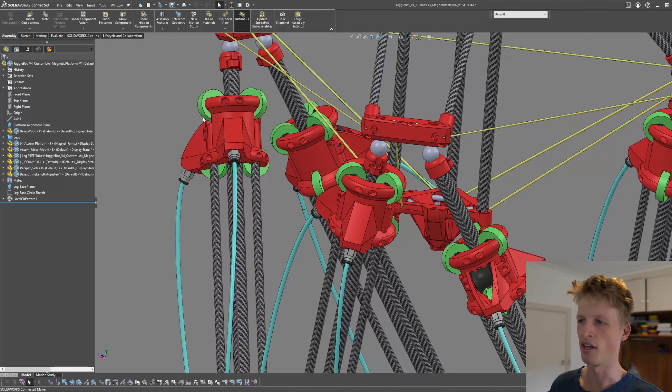I'm very excited about this video because it shows a pretty important upgrade that I'm making from the old design to the current design. Specifically, we're going to be going over the joints that attach the legs to the platform. I think to understand why these joints are the way they are right now, it's worth going back to revisit the old designs that I had to see why they didn't work.

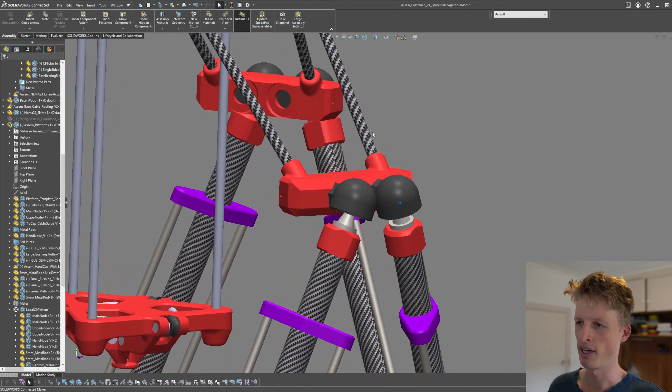The very first design that I had for this component consisted of some ball joints that I just bought online. And these joints were decent, they're very cheap, they're very easy to use, but they have a very limited range of motion. They can only move, I think it's like 50 degrees or something before they hit their end in any direction. And that's pretty annoying. That's very, very limiting.

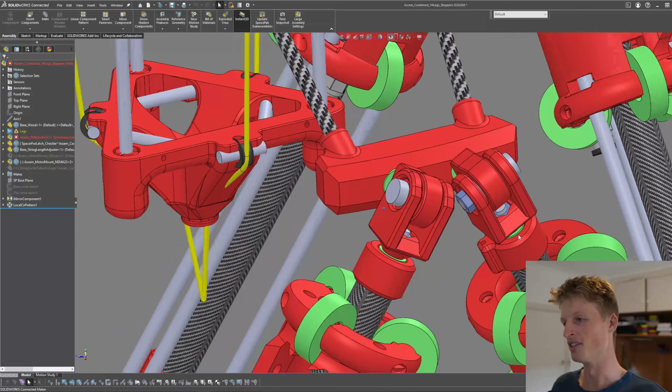Because of this limited range of motion, I had to be really careful with where I was positioning them, and if I made any changes to the rest of the platform, I would have to go back and change the angle where these cup parts attached onto this printed part. And I forgot to do that a couple times, and it meant I just had to keep reprinting parts, and it was really annoying. So the limited range of motion really killed these for me, and made them not really an option.

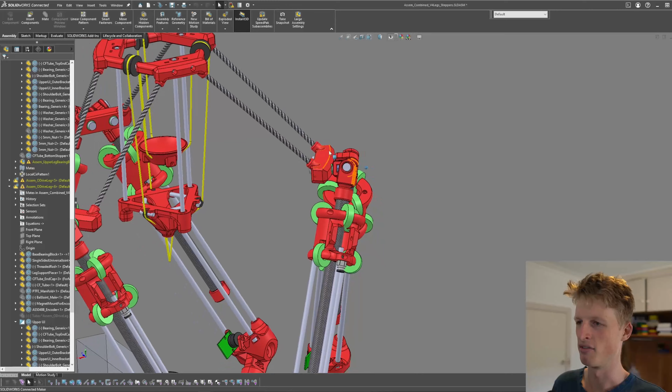Moving on from that, the next design that I had was these universal joints that I designed. And I think they look pretty cool, but they have some pretty big problems as well. The main one is that this part here is very small and is not super strong after it's printed. And one of these actually broke in my testing of Jugglebot, and I don't want to have to keep reprinting everything to make it all work.

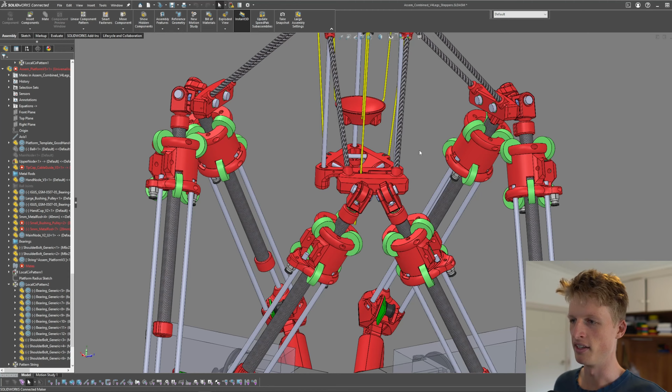Another big problem was that it's not really that modular. Like if I'm putting the platform part onto the rest of the legs, it's really tedious to have to screw up all of these bolts and do them one at a time. It's very slow and kind of hard to hold everything at the same time because there's 6 things that all kind of want to go in different directions, and it's annoying to have to hold them all.

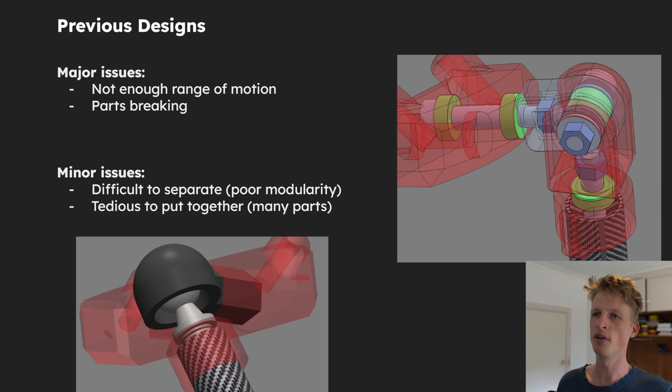This design definitely was better than the original one because it has a huge range of motion. Like these joints can go in any direction that I want them to, but their limited strength is a bit of a weakness, and the fact that they're not very modular was pretty annoying, and I would prefer to move out of that if I can. So the earlier designs, one of them didn't have enough range of motion, one of them kept breaking, and they're both pretty annoying to separate from the rest of the design, and the second design had way too many parts.

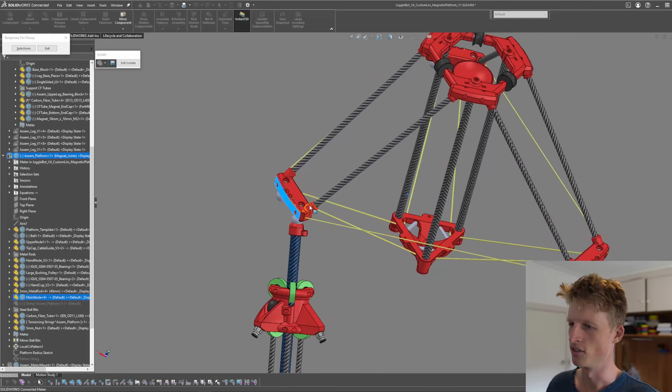Before jumping into my new design, it's worth going over what the design requirements of this part are so that we can see what it actually needs to do. The first one is that it has to be able to support 3 degrees of freedom. Now this might sound a bit cryptic, but all that it means is that the platform up here needs to be able to move relative to the leg in 3 ways. And these 3 ways are the 3 rotations.

So if I can drag this around, if it plays nice, it needs to be able to rotate that way and that way. This is a little bit messy, but hopefully you get the idea. And that way. If it can't rotate in all of these ways, then the mechanism will get jammed up in some positions and something will break. So it needs to be able to rotate in all directions.

The second design requirement is that it needs to have a really wide range of motion. I want Jugglebot to be able to move as far as it possibly can, and to do that, the joints themselves need to be able to move as far as possible. The third design requirement is that they must be easy to disassemble, and by this I mean easy to remove from the platform. I would like to be able to separate the platform from Jugglebot very, very easily, and to make any changes that I need to make without having to screw and unscrew everything. That was really frustrating with the old design.

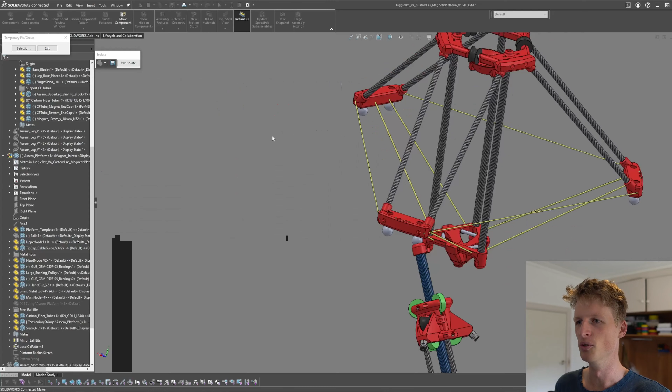Finally, this joint needs to have a solid and strong connection that is very smooth. If the joint is gritty at all, then it will impede the motion of Jugglebot and it will make it harder to control where it's going. So I need this joint to be really, really smooth so that as Jugglebot moves around, the joints just slide nicely and allow that motion to happen. It would also be quite nice if this component had as few parts as possible, because more parts is more effort. And effort is bad.

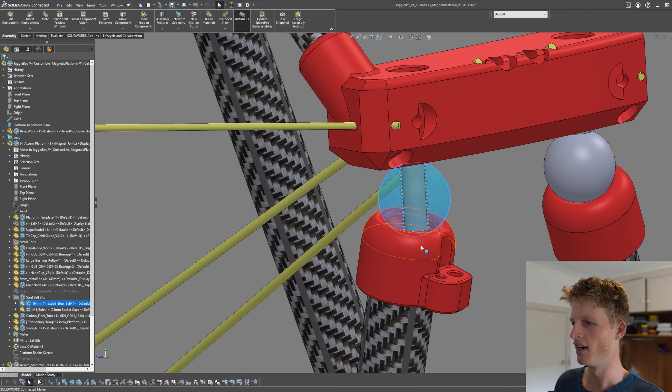So that brings us to my new design, which looks like this. And you can see already that this is far, far simpler than the previous design.

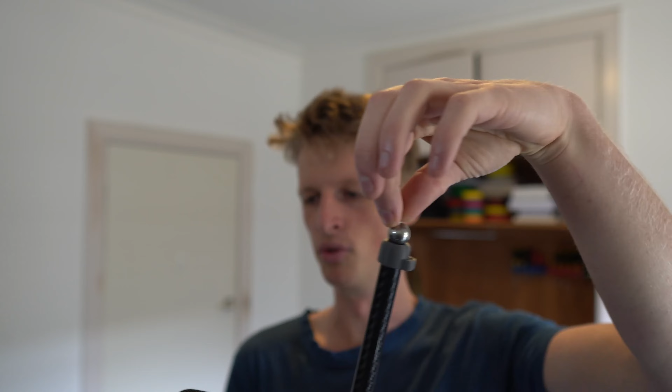So here, all that we've got is a bolt that comes through the printed part that's held on with a nut. That bolt screws into a metal ball with some thread. And then that ball is attached with a magnet to the leg. So this can just stick and unstick. And if you see here, it's very easy to separate it and attach it.

This joint moves super smoothly. There's really not much stopping it from sliding around, and it ticks all the boxes. Super wide range of motion. This can go really far in all directions.

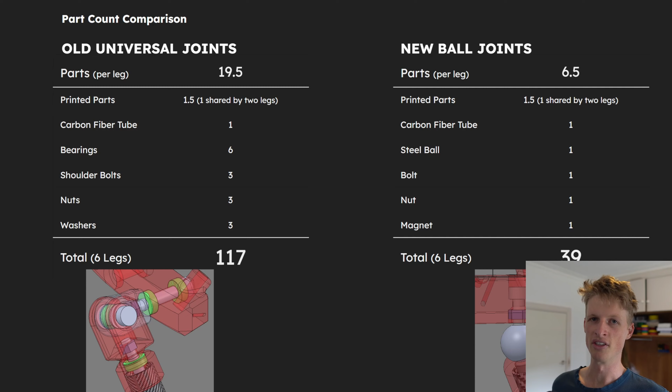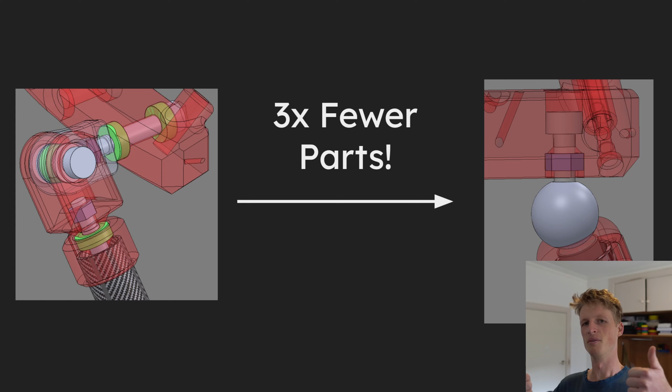It's great. To give this design an objective comparison with the old design, we can do a part count comparison. And we can see the old universal joints have 19.5 parts per leg, including all the bolts and the bearings and everything, which means that in total, between the 6 legs, there are 117 parts, which is nuts.

Compared to the new one, where there's only 6.5 parts per leg, meaning that there's in total only 39 parts between all 6 legs. So this means we have a 3x reduction in the number of parts that are needed for this component, which is fantastic in my mind. I'm very, very happy with that.

So this is all well and good, but does it actually meet all of the design requirements? The first is that it needs to support 3 degrees of freedom. And we can see pretty easily, just by holding it and moving it around, it can twist. So that's 1. It can move this way, and it can move the other way. All 3. It's a ball in a socket. Done.

The second is that it needs to have a wide range of motion. As we've already seen, it has an extremely wide range of motion. Third, it needs to be easy to disassemble, and it's a magnet. It's about as easy as it gets. And the fourth is that it needs to have a solid and smooth connection.

As for the solidity of this connection, it's definitely not as solid as the previous design was, because that was all hardware parts that were bolted to each other. And so this one can be removed, but it's fairly strong, and I think it will be strong enough.

I am not a Stewart platform expert, but I'm pretty confident that all of the forces that are going inside the legs are purely in the direction of the leg. So there should be very little force acting to separate this magnet from the leg. So I think that 450 grams-ish of force should be more than enough.

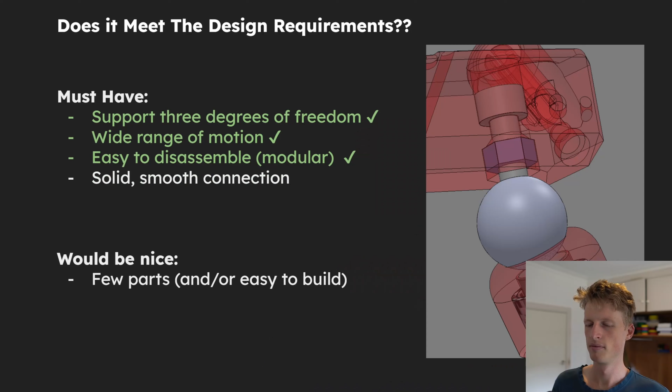As for the smoothness, this joint is fairly smooth as it is, but just in case it isn't smooth enough and it does cause some friction problems, I've bought some PTFE sheet that I might be able to stick between the ball and the printed part to maybe smoothen it up a bit.

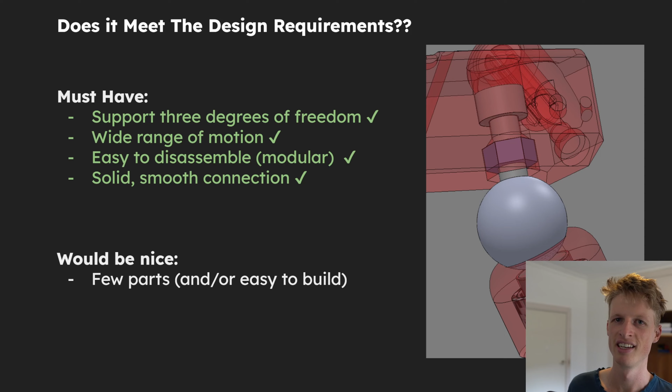And I'm thinking also I could add some fabric that I could lube up, and that will smooth things out a bit. But as it is, I'm pretty surprised with how easily the steel ball slides on the printed part. It's really quite good. So for now, I definitely consider this to have a solid and smooth connection.

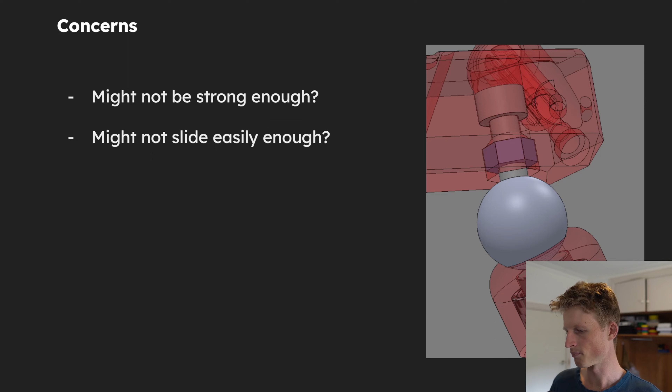And as we just saw, this design absolutely meets the would-be-nice requirement of having fewer parts, with a 3x reduction of the old design. So I'm pretty happy with that. Ticks all the boxes. I don't have too many concerns with the design, but one of them is that the magnet on the ball might not be strong enough.

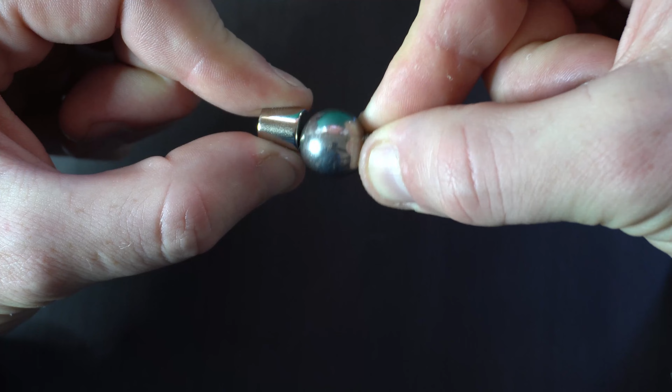If that is the case, and I do find that the platform separates from the legs when it shouldn't, then I can always either get a stronger magnet or just decrease the distance between the magnet and the ball. So I move myself over here. You can see there's a bit of a gap here between the magnet and the ball, and there is a bit of space there for me to reduce that down.

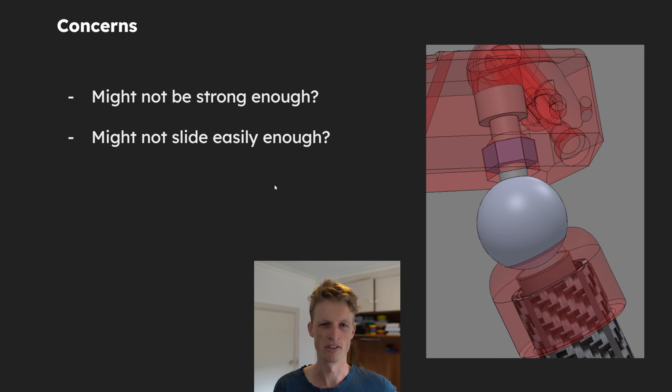If I have the magnet just on the ball by itself, it's very, very strong and works really well. The reason why I don't have just the magnet attached to the ball straight up, and why I have this printed cup part, is so that the magnet doesn't slide along the ball up and down, making it less precise as to where it's actually positioned.

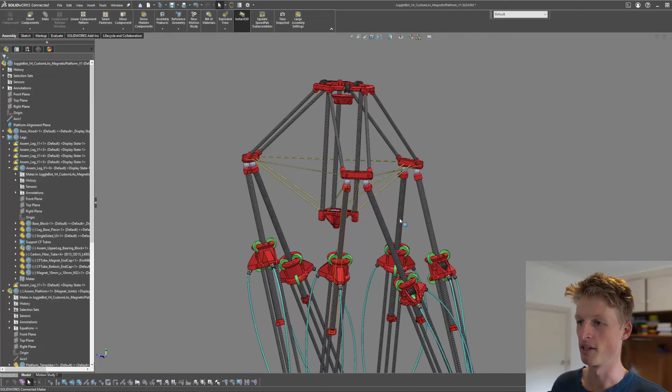And the second concern is that it might not slide easily enough. But I think it's pretty fine, to be honest, and even if it's not, I've got some ideas with the fabric and the PTFE sheet to alleviate that. And there you have it. The new design is so much better than the previous ones. It's fewer parts, it's easier to make, it's better in pretty much every way.

And I'm really keen to put this into the actual Jugglebot. I'm still waiting on some carbon fiber tubes to actually be able to make this design. And in the meantime, I'm going to be making a couple more videos on the specifics of how this design has improved on the previous one. You can see pretty easily that there are some big changes between this and this. It's definitely a big step.